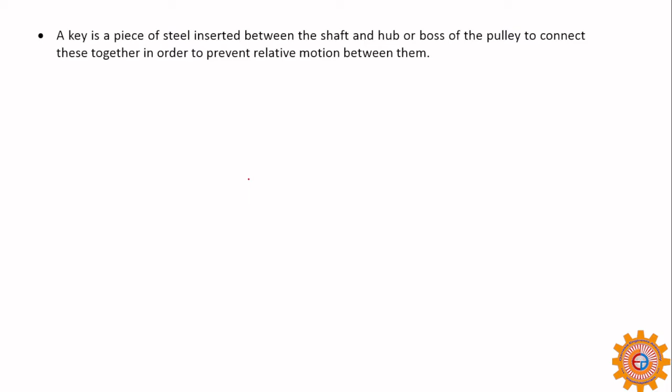A key is a piece of steel inserted between the shaft and hub or boss of the pulley to connect these together in order to prevent relative motion between them. So the main aim of the key is to assemble separately both coupling and shaft. It acts as an agent to transmit torque from the shaft to the coupling and then another shaft. That is the situation.

This is the shaft, and this is the keyway in shaft. So this is the key. It is inserted in the keyway. Half of the keyway is in the shaft, the other half is in the hub or boss.

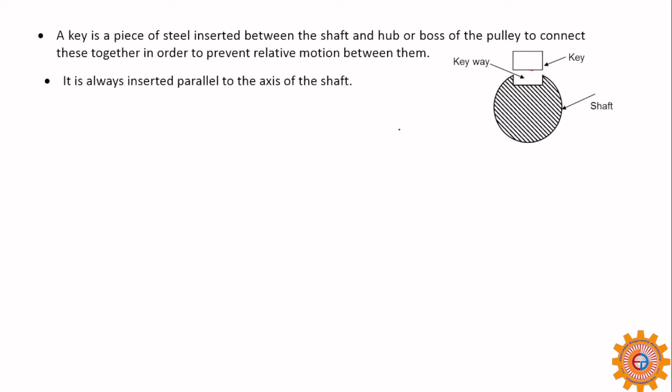It is always inserted parallel to the axis of the shaft. The lower part of the key is always parallel, but the upper part sometimes will have a taper, that is 1:100.

Keys are used as temporary fastenings and are subjected to considerable crushing and shear stresses. This means the key is subjected to both crushing, or compression, and also shear while transmitting the torque from the shaft to the coupling or hub of the boss of the pulley.

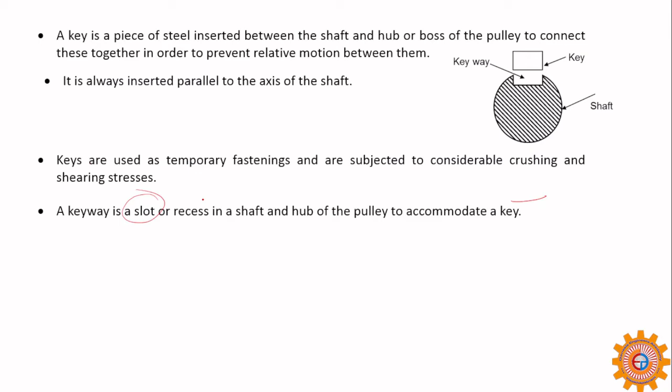A keyway is a slot or recess in a shaft and hub of the pulley to accommodate a key. It is a slot made by different operations like milling, shaping, and also sometimes on the lathe.

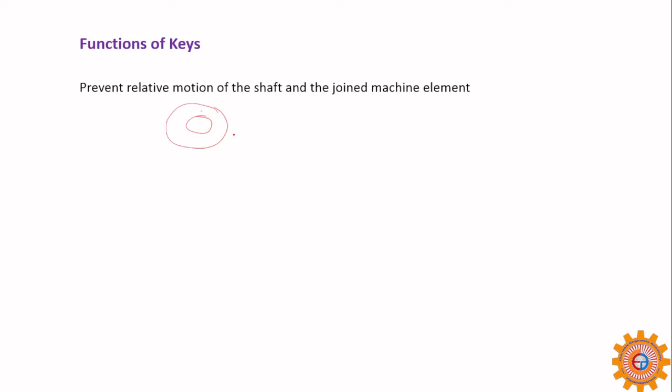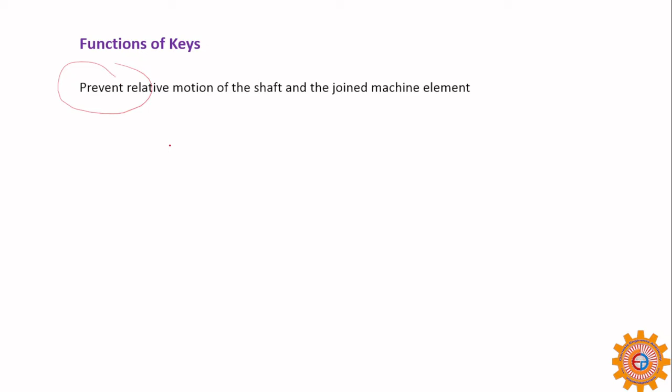The functions of keys: first, it has to prevent relative motion. This means the shaft and the hub or coupling should move at the same velocity, so there won't be any difference in velocities. The relative motion between the shaft and coupling is zero. So the key's prime aim is to prevent relative motion, and also it has to transmit the torque from the shaft to the hub and from the hub to another shaft.

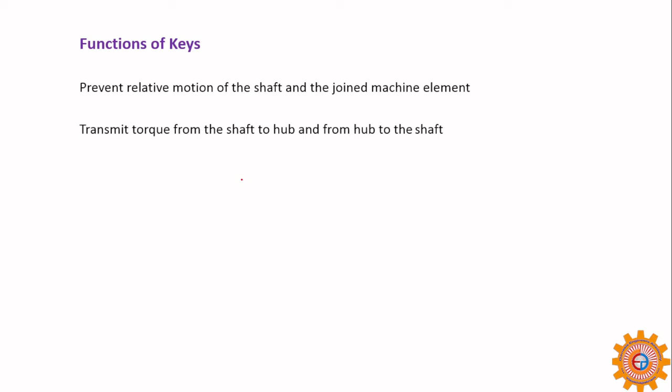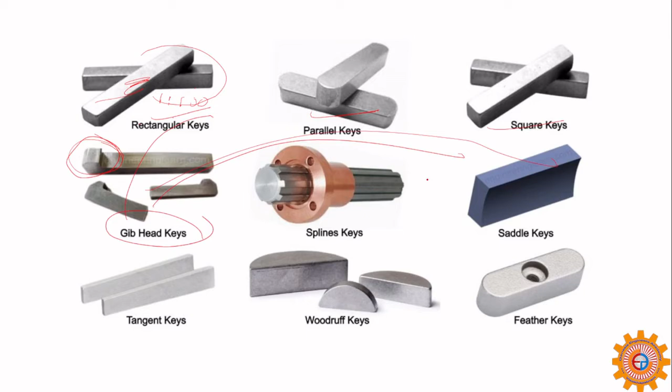There is another type where the end of the rectangular or square key has a feature to facilitate removing the key from the hub and shaft. We provide this gib, so it is called gib head keys — gib head rectangular keys, gib head parallel keys, gib head square keys. All these can be used with a gib, the difference being only the gib part. The next one is saddle key.

Saddle means it rolls over the shaft and can accommodate some types of misalignments. The other one is called tangent keys, which are tangent to the shaft. The most important one is the Woodruff key. A Woodruff key is part of a disc shape — if you cut any disc halfway, we can call that a Woodruff key. This accommodates misalignment by adjusting itself so there won't be misalignment.

The next one is called a feather key. Feather means it is fitted in the keyway, sometimes using a nut also.

Next, the most important one used in gearboxes in automobiles is the splined key. Here the key is an integral part of the shaft, not a separate inserted key. It has sliding facility — the splined key facilitates the sliding of the shaft. In the other types, there is no sliding.

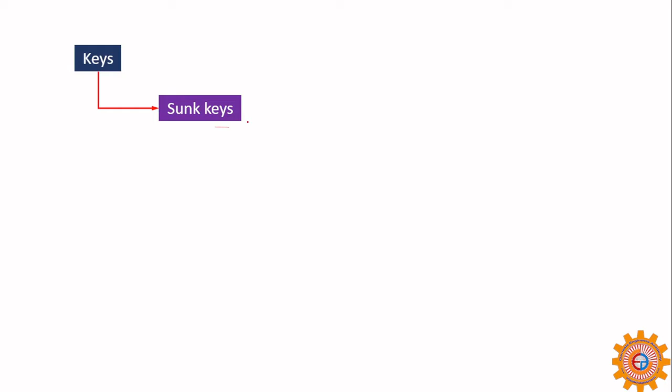Classifications of keys: the first one is a sunk key, meaning it sinks into the keyway of the shaft and the keyway of the hub or boss of the pulley.

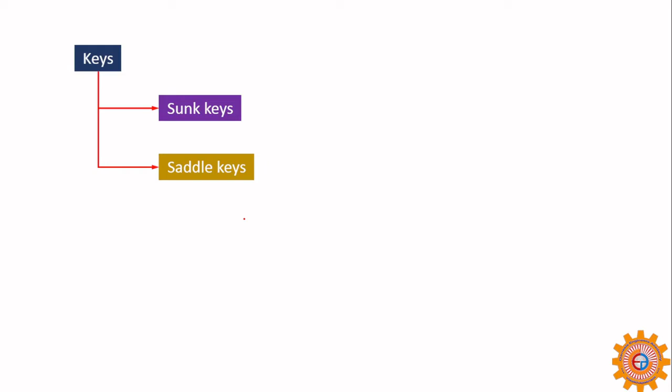Next one is saddle key. Saddle refers to the one used in horse riding, where the rider has a seat on the horse as a saddle. That is why it is called saddle key.

And the third one is called tangent key. This key acts at a tangent, assembled as a tangent to the shaft.

And the third one, next one is round key. It means a small rod is used, that we call it round. In this one, there is not much torque.

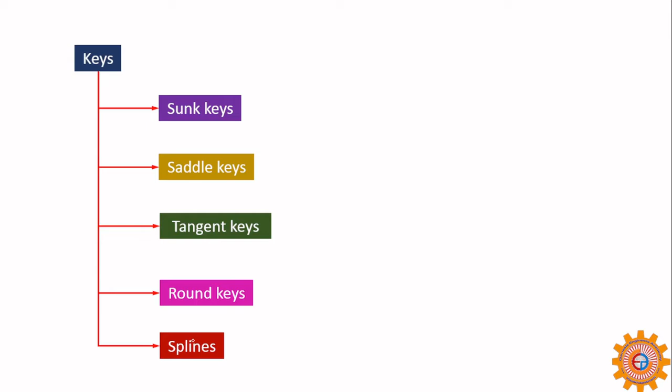Next one is splines. I have already told you the key is not a separate one; the key is a part of the shaft and the other part will have the other keyway. In sunk key, we have separate keys: rectangular, square, parallel, and gib head. All are same by cross section, looking similar. Rectangular cross section, square cross section will have a taper of 1:100. The parallel one will not have any taper, that is why it is called parallel. To facilitate easy removal of the key, we provide a gib at one end of the key.

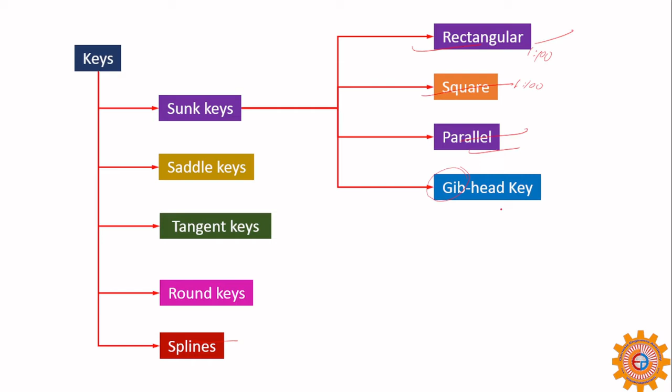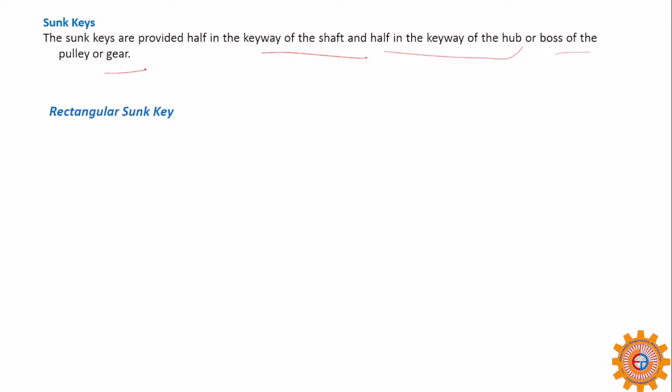Next one is feather key, small like a sheet. Next, what is sunk key? Sunk keys are provided in the keyway of the shaft and in the keyway of the hub or boss of the pulley or gear.

You will be asked to have the proportions. Suppose D is the diameter of the shaft, then the key width will be D/4, which you can round off, and the thickness will be D/6. Both width and thickness will be like this. It's a rectangle, so this is D/4, this is D/6. So this is the key. And the upper part will have a taper.

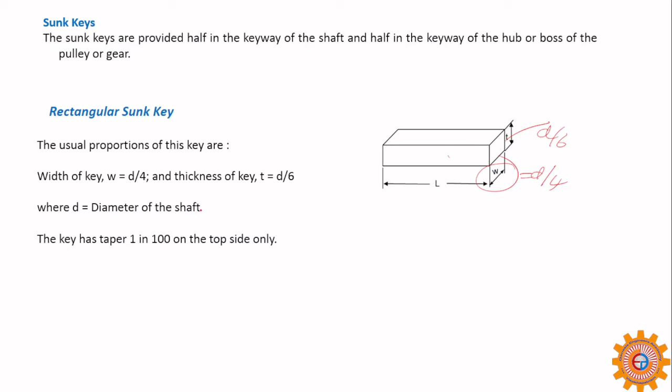That taper is 1:100, you can say, only on the upper part that is in the keyway of the hub or boss of the pulley or gear. So this is a key, this is the width, D/4, and this is the thickness, D/6. So we have to verify the stresses induced in the key, and then you can also go for square instead of rectangular.

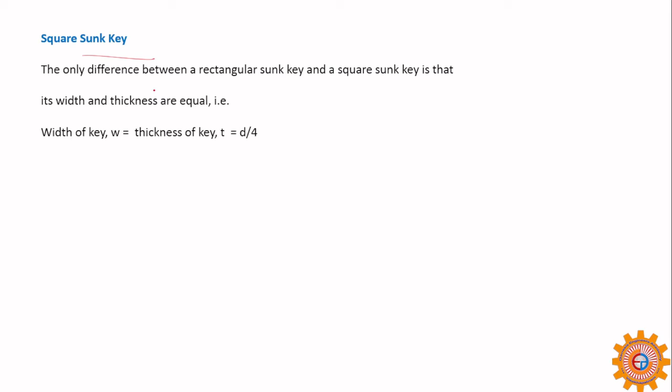Next one is square key. Square key means D/4 only - width is D/4 and thickness is also D/4. So what's increased compared to rectangular key? The thickness is D/6 in rectangular, but in square key the thickness is D/4, much higher. So it will be a very strong one. Majority of the larger shafts which transmit larger power use square key.

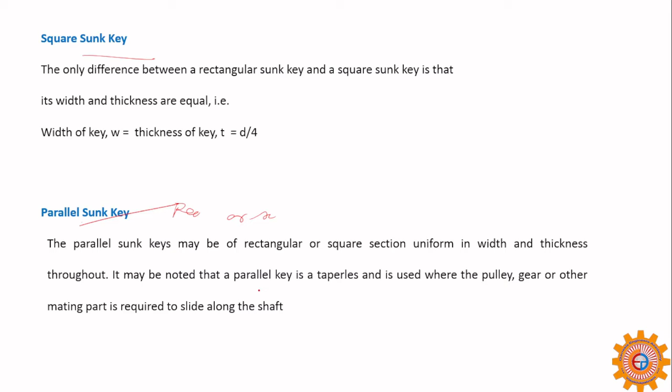Next, parallel key. What is the difference between parallel and sunk key - maybe rectangular or square? The only difference is we don't have any taper on the top of the key.

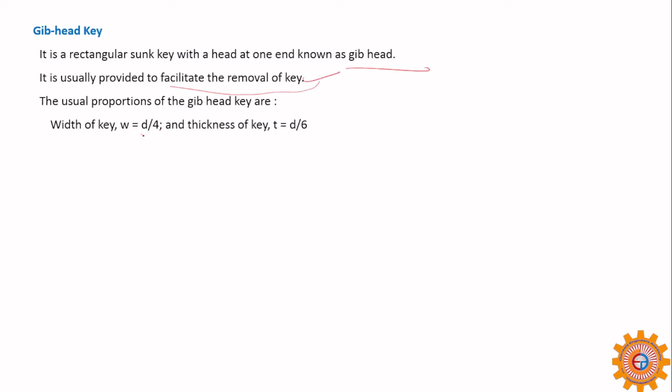Next, gib head key. It is a rectangular sunk key with a head at one end known as gib head. It is usually provided to facilitate the removal of the key. The usual proportions are rectangular proportions: D/4 width, D/6 thickness, and for the gib, the width is as that of this part, and the part is 1.5 times t, where t is the same thickness.

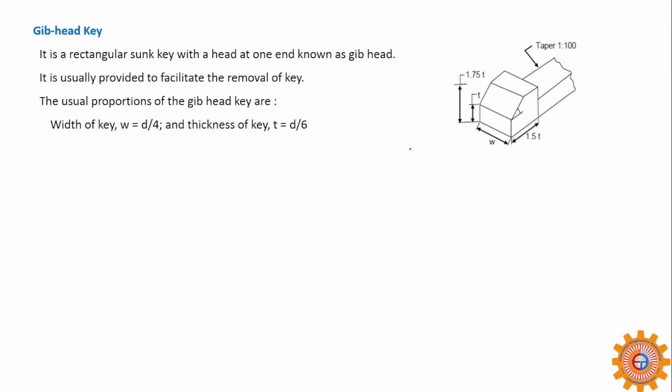Only here we have to provide a 45 degree angle. If you draw it like this, the height is 1.75, width is 1.5. From that you can make this gib, though it won't go through into the coupling part or above the boss of that one.

Next, feather key - a key attached to one member of the pair which permits relative axial movement of the other, known as feather key. What is the importance of this one? This key is connected to only one, and by fixing it you will have relative axial movement like this - there is free movement, but no rotational movement. So it is a special key of parallel type which transmits turning moment and also permits axial movement. In general there is only turning moment with no axial movement, so axial movement is possible only in feather key.

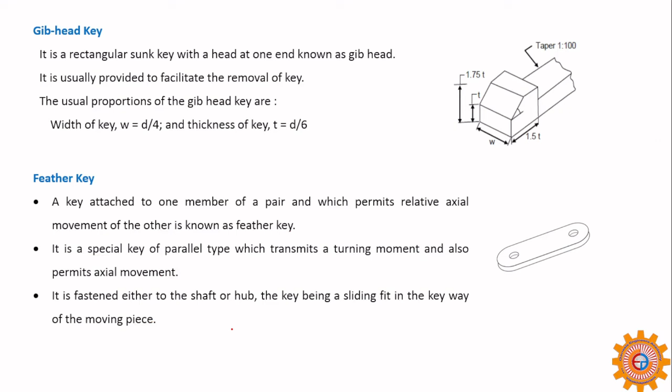It is fastened either to the shaft or hub, the key being a sliding fit in the keyway of the moving piece. If you are familiar with limits and fits and all these things, it is a sliding fit like a splined connection.

Next one is Woodruff key. The Woodruff key is adjusted like this - it is an easily adjustable key. It is a piece from a cylindrical disc, having segmental cross section in front view. This key is generally used in machine tools and automobile construction.

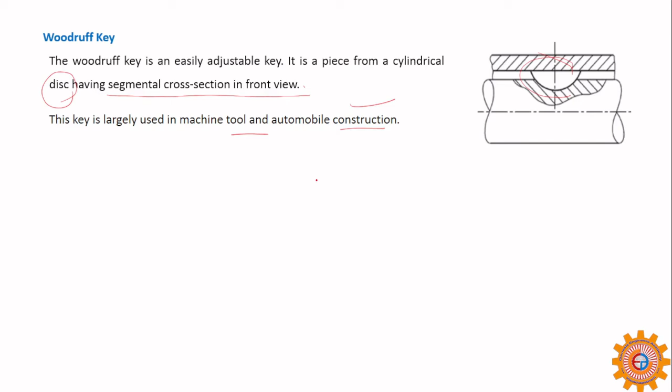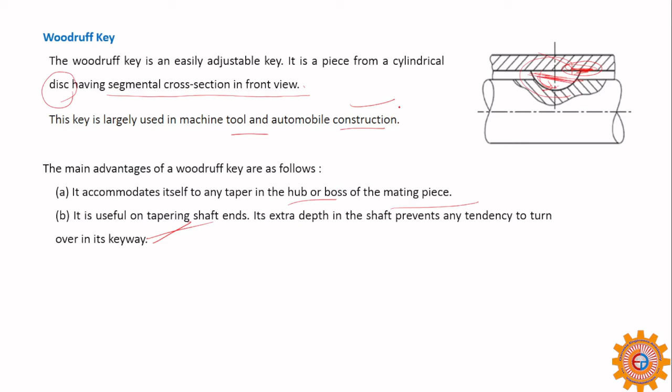Even if there is misalignment - axial misalignment, lateral misalignment, angular misalignment, these three types - it can accommodate all these things. It accommodates itself to any taper in the hub or boss of the mating piece. If there is any taper, it tilts by itself, it won't be in a parallel position. Its extra depth in the shaft prevents any tendency to turn over in its keyway - this extra material means when it wants to turn, it won't have a turning movement. That is the importance of the Woodruff key.

Next one is design of a rectangular sunk key, also called a square key, also called a jib, sometimes.

So first in key design, what we usually do is go for empirical formulas first. Based on empirical formula, you have to calculate what are the stresses induced in the key. One is called torsional shear, the other one is compression, or otherwise crushing stress.

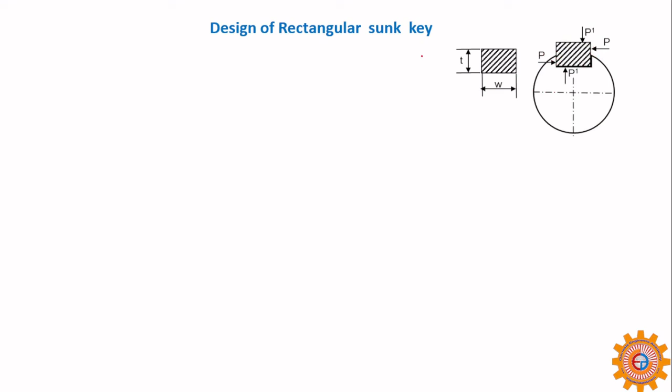Now the force PP forms a couple which tries to roll the key in the keyway, and P1 forms a resisting couple which prevents the roll of the key in the keyway. These couples will balance so that there will be no roll, that is rotation, of the key in the keyway. If that happens, it won't transmit full torque or otherwise power. So it has to sit there only.

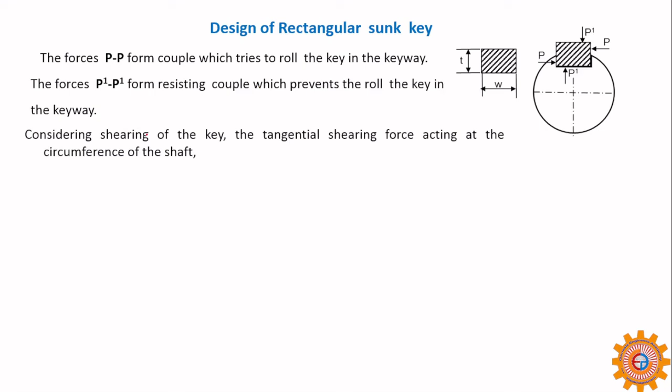Okay, next one. Considering the shearing strength of the key, the tangential shearing force acting at the circumference of the shaft - so this is this one. So this area is, this is W and this is L. So the shearing area is L into W. Got my point? So this is shearing area.

Shearing area into shearing stress will give us - I'll draw once again - tau, L into W. So this forms shear force. This part I am taking, and if you take this is d by 2, that is radius. So this shear force into d by 2 will give us a torque.

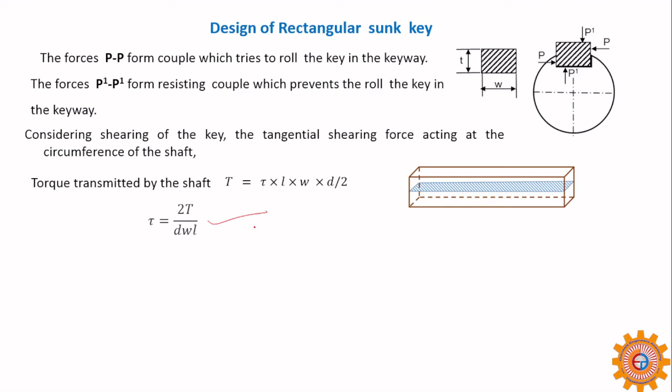So this is the shear stress you have to calculate, and W is the width of the key, L is the length of the key.

Now after having studied this one, we will move into the crushing of the key, that is the tangential crushing force acting at the circumference of this one. So this is the area, you understand? This is already we know, this is thickness and this is W.

Okay, next the shearing area or crushing area is - what is that? Crushing area is length into T by 2. So this height is T, taking only half of this area is inserted in the key. So the key part in the shaft will be subjected to crushing. That's why we take the L and the thickness, that one.

We don't consider that, but that is there in forming the couple also. For calculations, we use the part of the key in the key shaft. That has to be known to you.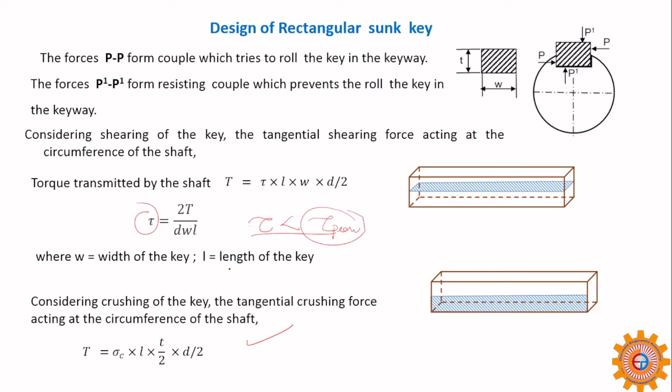By comparing these two, you have to fix it - that is, it has to withstand both shear stress and also crushing stress. That's our design. So if the induced stress here, tau, is more than the permissible shear stress or otherwise yield stress, you have to increase the size and then check whether it withstands the shear stress.